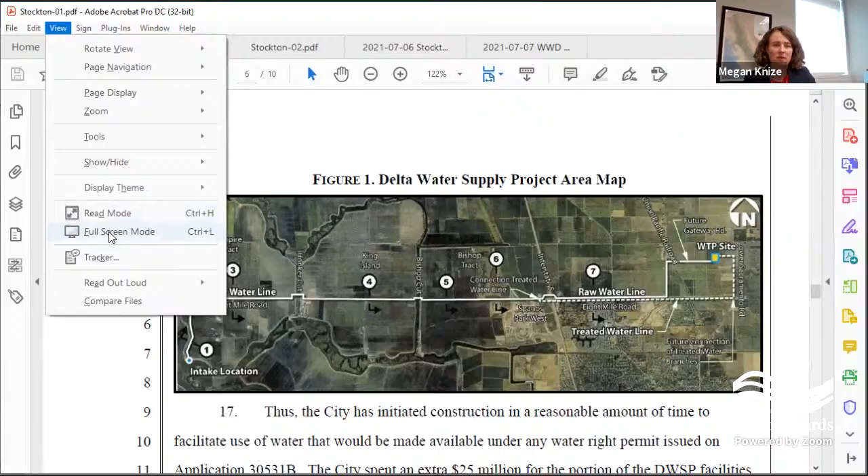I'll try to describe it for those that are not familiar with the project itself. On the lower left side, you see intake location. That's number 1. That's the location of our intake pump station on the southwestern tip of Empire Tract.

It's a facility that has a pumping house, state-of-the-art fish screens, the pumps located. There's 4 of them. Each of them are 250 horsepower, capable of diverting up to 80 MGD. As you travel northbound, you see the white line extends all the way up to what's called 8 Mile Road.

That's our raw water intake pipeline. It's a 54-inch line. It travels from west to east along 8 Mile Road, down across King Island, across Bishop Tract, and under I-5, all the way over to where you see WTP site. That's about 12 miles, 54-inch raw water line.

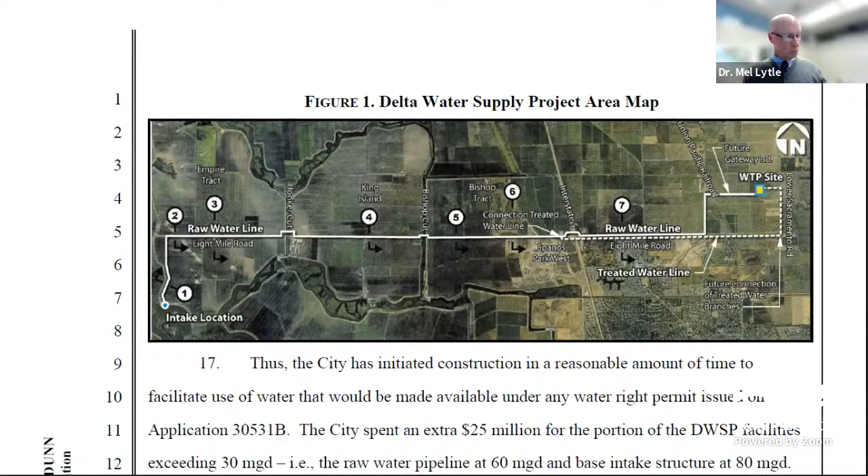So under both Part A and Part B, the project itself is ready to go as demand increases. Ultimately, at full build out, it would require new tooling at the actual intake pump station. It would require an additional raw water line and expansion of the treatment works. But that would be done over progressive numbers of years. That allows us to maximize the full usage of Part A and Part B.

Now, as evidence of the city's financial resources, many people I'm sure are familiar that the city of Stockton declared bankruptcy several years ago and has since recovered from that. The utility itself was never subject to the bankruptcy. The water utility itself is supported under ratepayer funding, and we've been under the common practice to move ahead with water rate studies and projected increases every 5 years. We just completed a water rate study and rate increase this last year.

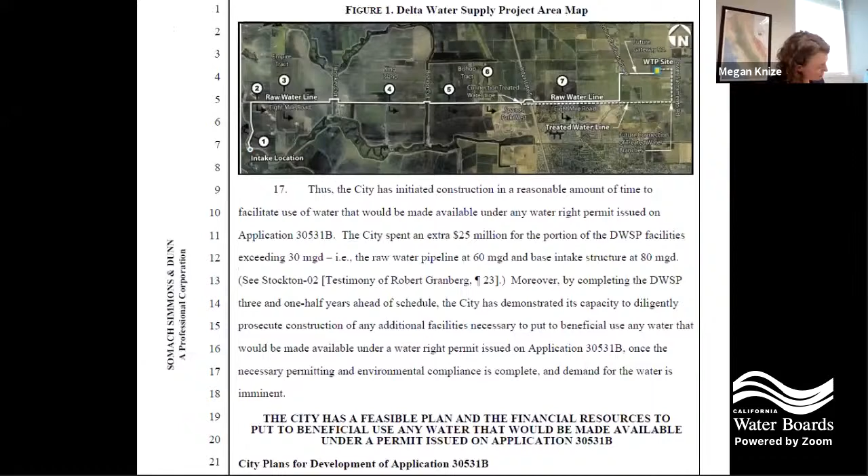Okay, Ms. Mullen, could we scroll down to paragraph 18, please? And so the first sentence, the city has developed a phased plan for the use of water under application 30531. And in this paragraph, you describe some of those efforts. As far as CEQA documentation and planning to comply with CEQA requirements, has anything been done since 2005? There are a lot of references to the 2005 draft DWSP EIR, but is there anything else as far as using this water that's been done since 2005?

Not specifically by the city that I'm aware of, but, not included in my testimony, we did participate in a more regional programmatic effort that looked at an overall integrated conjunctive use program, here we are with that word again, for the county. And that was done after 2005. Do you know what year you participated in that program? I think it was 2009, 10. Okay. But I can get the actual date when that document was published.

Okay. And since 2009, there have not been other efforts that you're aware of that the city's been participating in with respect to CEQA planning and documentation for use of this water? No, not specifically. Okay. I wanted to ask about something in paragraph 19. Ms. Mullen, could we scroll to page 7, please? At the end of this paragraph, lines 14 and 15, you describe Project 20 in the Groundwater Sustainability Plan, mobilizing recharge opportunities, which could help address this overdraft.

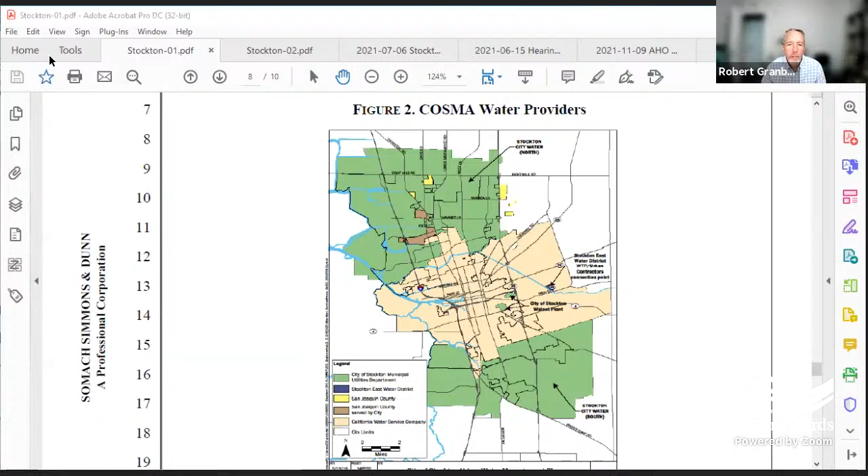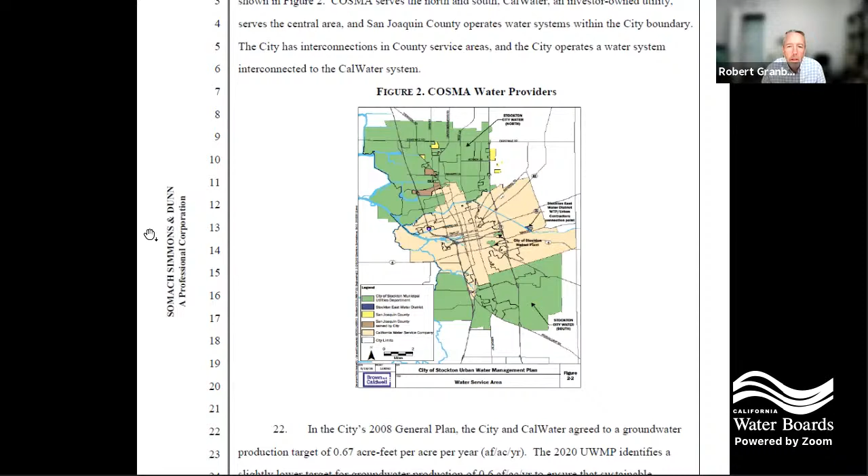Well, I'll start. Maybe if we can get that figure up on the display for everyone's benefit. But Stockton's wastewater plant is called the Stockton Regional Wastewater Control Facility. So it's a regional facility that serves not just the city of Stockton's water utility, but all of the water utilities that are supplying water for M&I use in the metropolitan area. So it's the green, the tan, and then the darker tan or brown areas within the north part of the city of Stockton. Now, let me take a step back. So this figure shows the water utility systems that supply water to the metropolitan area.

So you have the green area, which is the city of Stockton water utility that's owned and operated by the city of Stockton through the Municipal Utilities Department, led by Dr. Lytle. So the city of Stockton has the north area, the south area, and then there's a couple of small service areas within the Cal Water system that supply the Diamond Walnut processing plant and a small urban residential development right there at the intersection of Highway 4 and Highway 99. The light tan color there is the California Water Service Company water service area. Historically, they were the original water supplier for the metropolitan area. And when the city came into being, they took over the north and south.

The county has retained 2 water service districts that are completely surrounded by the city of Stockton system, and they obtain their water through the city of Stockton system. Similarly, the Walnut plant and the small residential development that I mentioned previously is served by the City of Stockton Water Utility. They're City of Stockton customers, but the water comes through the California Water Service Company distribution system. So there's a lot of interaction amongst the urban contractors on moving water through our systems to serve others. We have interconnects between our systems for reliability purposes and the ability to move water from one area to another. So the water supply source for the urban contractors, which are the three entities, is the Stockton East Water District primarily.

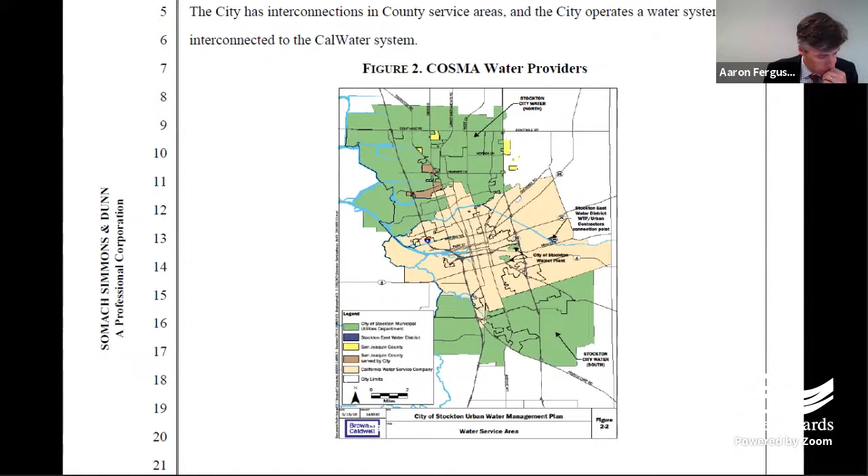Cal Water is, as I said, they're a contractor to the Stockton East Water District, and they have supplemental groundwater wells to meet demand. And that's how we come up with that total amount of water that is treated at the regional wastewater control facility that's owned and operated by the City of Stockton. Thank you. Does that answer your question or clarify that? Yes. That's the only question I have, Ms. Nyes. Okay, thank you very much.

So Mr. Ferguson, would you like to move the City of Stockton's exhibits into evidence? Yes, I would, please. Okay, and are there any objections from anyone? Okay, hearing none, Stockton exhibits 1 through 25 are accepted into evidence. And then we're also going to move what we're calling the AHO exhibits into the evidentiary record. So we prepared an Excel spreadsheet with these exhibits. I think there's 117. So these are then publicly available and they're on the FTP site. So at this time, I'm going to check if there's any objections to moving AHO exhibits 1 through 117 into the evidentiary record. Okay, hearing nothing, I will accept these exhibits, and they're again all in the City of Stockton application 30531B folder in the hearing documents folder.

So we set a deadline for rebuttal. I don't know if any party is going to have rebuttal, but I'll just ask if any party wishes to provide any rebuttal evidence. Okay, not hearing anything from any party. So I'm going to thank everyone today. I think we're almost finished. I do have one housekeeping item before I make some comments about closing briefs, and I don't see Mr. Cody still on the call. We have not received the policy statement that he sent, so we will follow up with him separately to ask him if he could resend that. Are there any other procedural concerns or comments before we talk about closing briefs and finish up? Okay, we don't see any hands up.